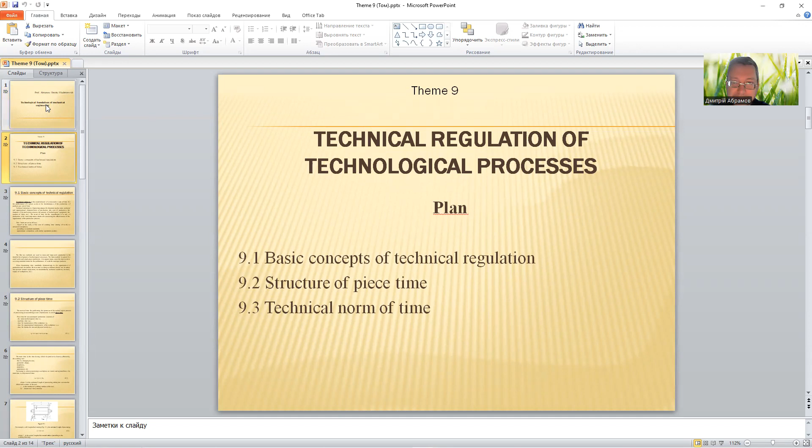Today is theme 9. Lecture on Technological Foundation of Mechanical Engineering. And theme 9, Technical Regulation of Technological Processes. Write down to your notes the theme of our lecture and the plan of our lecture.

9.1, Basic Concepts of Technical Regulation. 9.2, Structure of piece time. 9.3, Technical norm of time. 9.1, Basic concepts of technical regulation. 9.2, Structure of piece time. And 9.3, Technical norm of time.

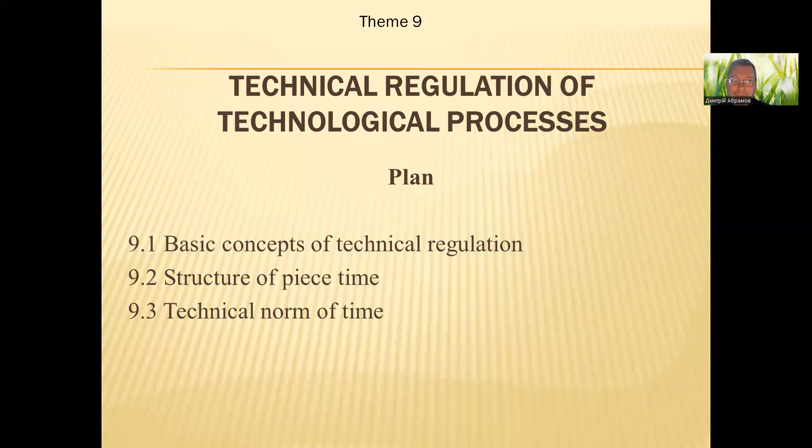And we start item 9.1, Basic concepts of technical regulation. So, what is technical regulation? Technical rationing is the establishment of a reasonable norm of time for the performance of a given work or the determination of the production of products per unit of time.

Technical rationing is of great importance for determining the main technical and organizational characteristics of production, the cost of production, the duration of the production processes, the amount of technological equipment, the number of labor, etc.

The norm of time for the manufacture of a unit of production is the most important criterion for assessing the effectiveness of the organization of the production process. Time limits are set as follows. Based on the study of the cost of working time, timing of work, at advanced enterprises. According to standards. Approximate comparison with similar operations.

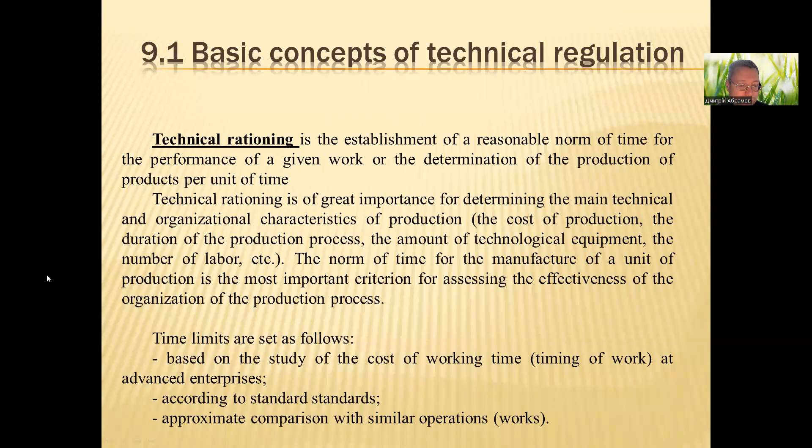The latter method is typical for small-scale and single-piece production. It's method number 3, approximate comparison with similar operations. It is approximate since the time norm is set using standard norms for the performance of work for analog products.

When determining time standards, shortcomings in the organization of production and deviations from normal working conditions should not be taken into account: idle equipment, its unsatisfactory technical condition, untimely supply of workpieces, etc.

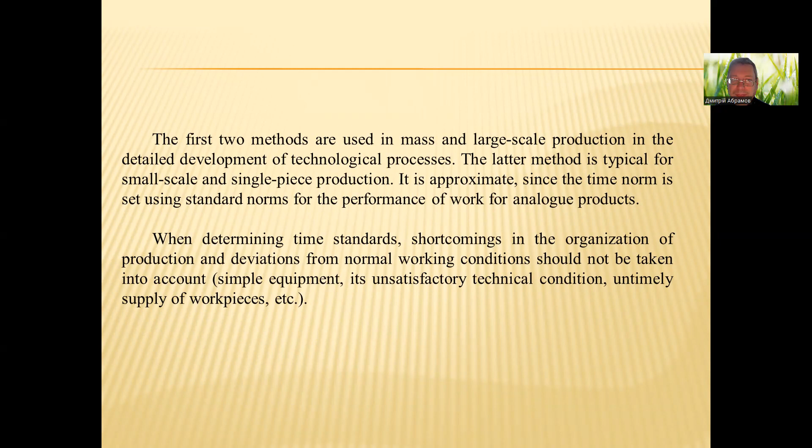Item 9.2, structure of piece time. The norm of time for performing the operation of the technological process of processing or assembling a unit of production is called piece time. Please write down to your notes what piece time is. It's the norm of time for performing the operation of the technological process of processing or assembling a unit of production.

Piece time for non-automated production consists of the main technological time, T suffix 0. Piece time, T suffix P, is equal to T suffix 0, the main technological time, plus auxiliary time, T suffix aux.

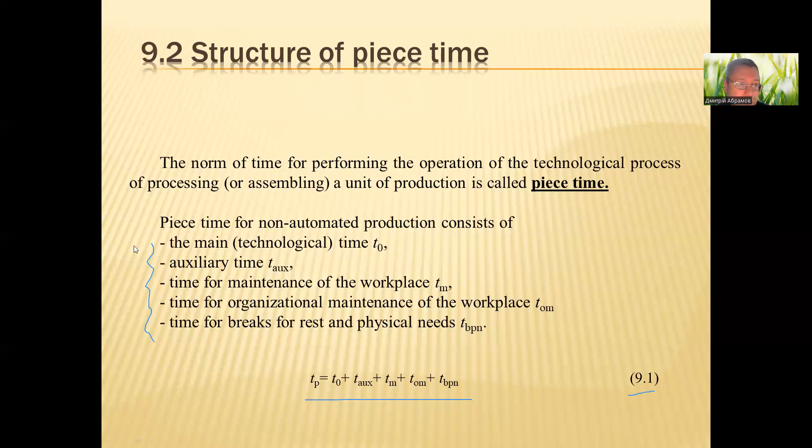The main time is the time during which the product is directly affected by the working tool, that is, changing its size, geometric shape, roughness, properties, appearance, etc. So, one more time, the main time is the time during which the product is directly affected by the working tool.

For example, when processing a workpiece on metal cutting machines, for example on the lathe, the main time is chip removal time. So the main time T suffix 0 is equal to big L multiplied by i and divided by S suffix M. It's formula 9.2. In this formula, big L is the estimated length of processing taking into account the infeed and overrun of the tool.

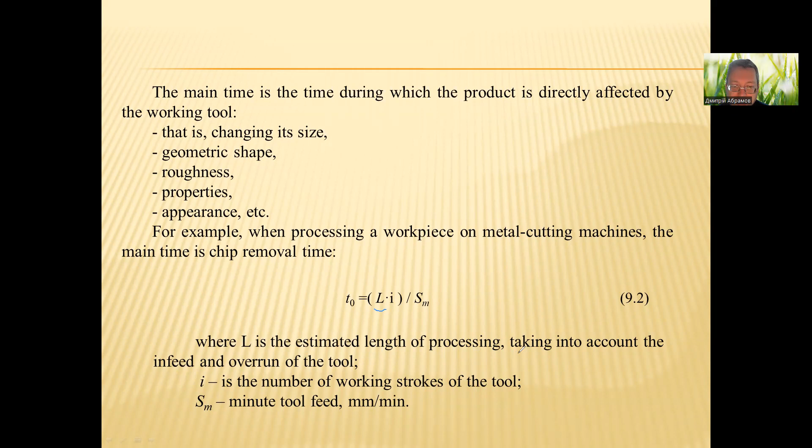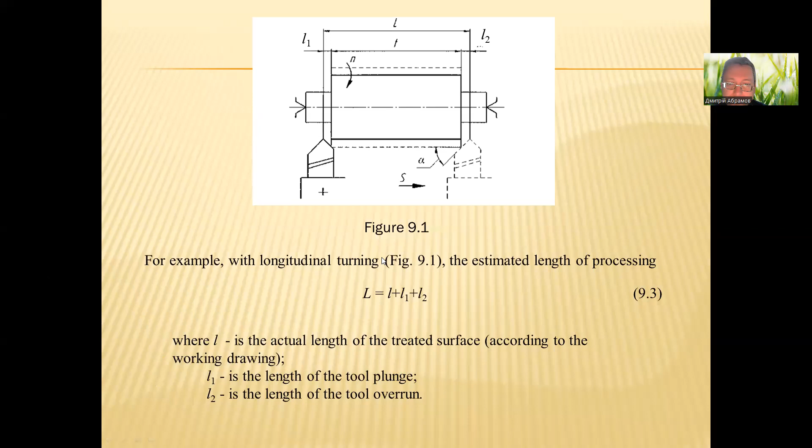And we start the next slide. The estimated length is determined in each case depending on the scheme and type of processing of the workpiece.

Auxiliary time, T suffix aux, is the time spent as a rule on the implementation of auxiliary transitions, installation and removal of the workpiece during processing, starting and stopping the machine, changing processing modes during the operation, measurement and quality control of the workpiece, measurement and quality control of the finished part, etc. Please write down to your notes the parts of auxiliary time.

Distinguish between overlapped and non-overlapped auxiliary time. Continuous non-productive time refers to the actions of the worker that are not in the process of processing. For example, setting or removing a workpiece or blank.

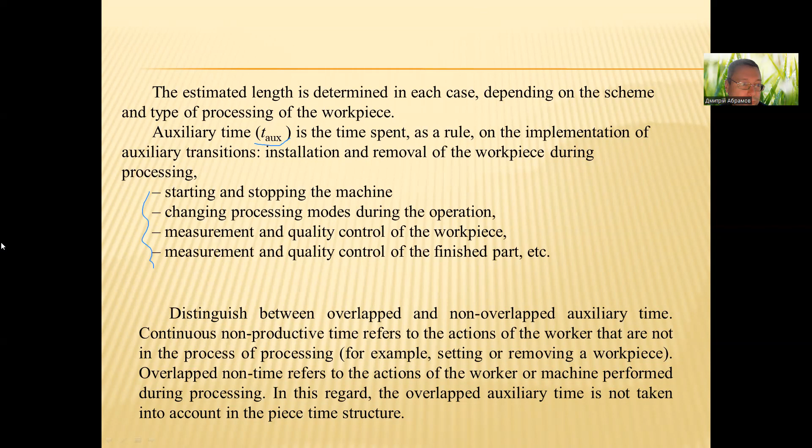The sum of the main and auxiliary non-overlapping time is called operational time. Operational time is the sum of the main and auxiliary time. Main time plus auxiliary time. Write down to your notes formula 9.4.

The maintenance time, T suffix M, of the workplace is a part of the piece time spent on the following actions: changing and editing tools, adjustment of the machine during operation, removal of chips during the performance of a given work. It's the maintenance time.

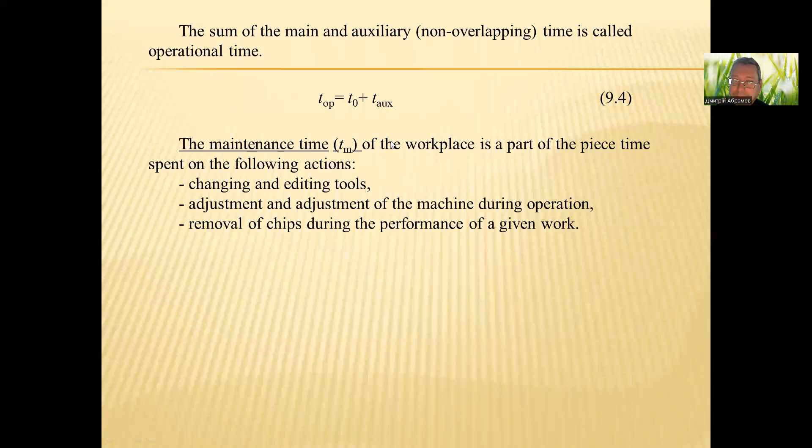The time of organizational maintenance of the workplace, T suffix OM, is a part of the unit time spent on caring for the workplace during the shift. It includes the following steps: layout of the tool at the beginning of the shift and cleaning it after the end of the shift. Cleaning, lubrication, inspection, and testing of the machine. It's time of organizational maintenance, T suffix OM.

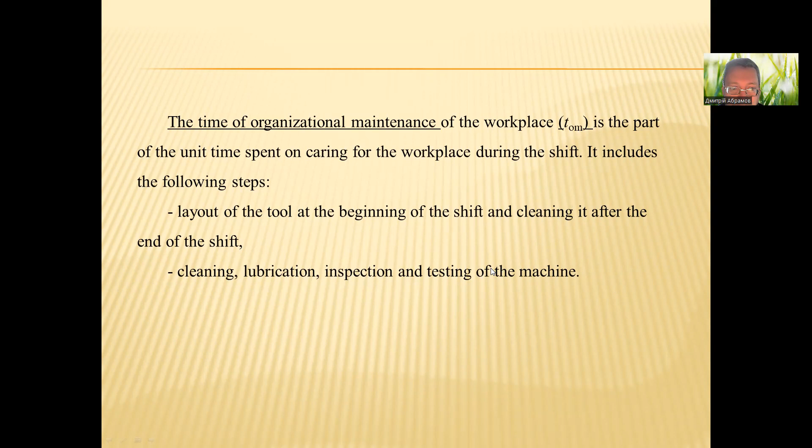Time of breaks for rest and physical needs, TBPN, is part of the piece time regulated by labor legislation when performing heavy and tedious work.

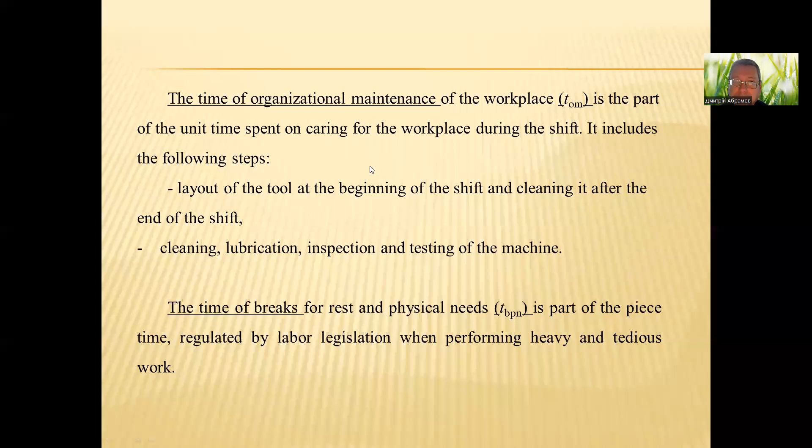Auxiliary time for this type of works is calculated according to its constituent elements on the basis of current standards. The time of organizational and technical maintenance of the workplace and breaks is determined as a rule as a percentage of the operational time. Thus, piece time is calculated by the formulas 9.5 or 9.6.

In formula 9.6, T suffix 0, the main technological time. T suffix auxiliary, auxiliary time. T suffix 0 and T suffix auxiliary again, and coefficients A and B. A, the share of time as a percentage for technical and organizational maintenance of the workplace from the operational time. A is equal from 3 to 5% from operational and auxiliary time.

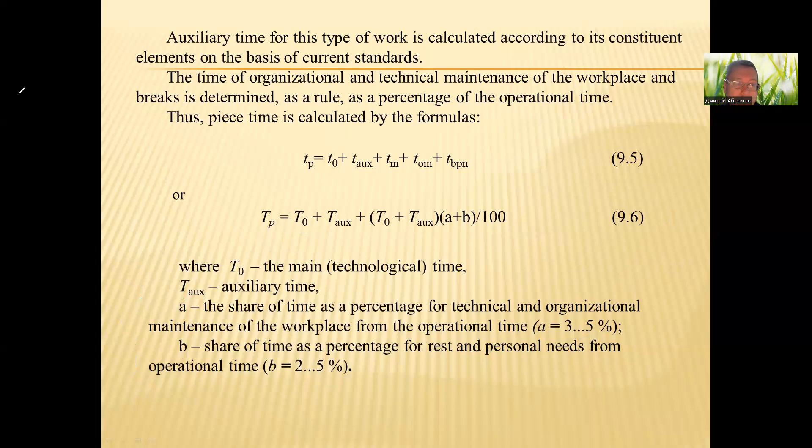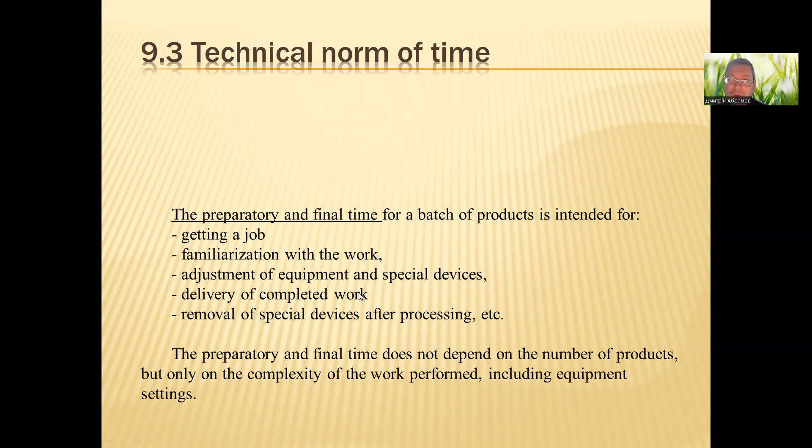And we start item 9.3, technical norm of time. The technical norm of time depends not only on the actions carried out directly in the performance of a given work, but also on the duration of the preparatory and final work necessary to process a batch of workpieces or products. The preparatory and final time for a batch of products is intended for getting a job, familiarization with the work, adjustment of equipment and special devices, delivery of completed work, removal of special devices after processing, etc.

Write down to your notes types of preparatory and final works for the preparatory and final time. The preparatory and final time does not depend on the number of products, but only on the complexity of the works performed, including equipment settings.

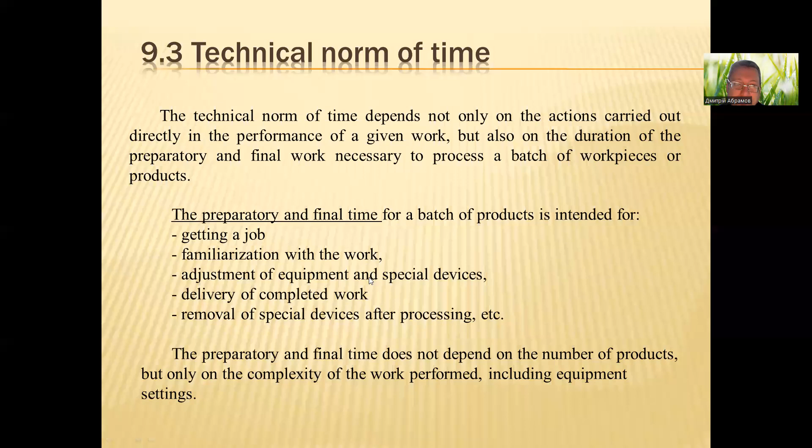In a single production, the preparatory and final time is included directly in the piece. In mass production, the repeatability of the work performed is high, so there is no need for preparatory and final operations. In serial production, the norm of time for processing a batch of workpieces we can calculate using the formula 9.7.

T P C N is equal TP multiplied by N plus T suffix PF. In this formula, TP is time, N is the number of parts in the batch, TPF preparatory final time. It's preparatory final time.

In technical norm of time for processing the workpiece, T piece calculation is equal T piece plus TPF divided by N. N is the number of parts in the batch, and TPF is preparatory final time.